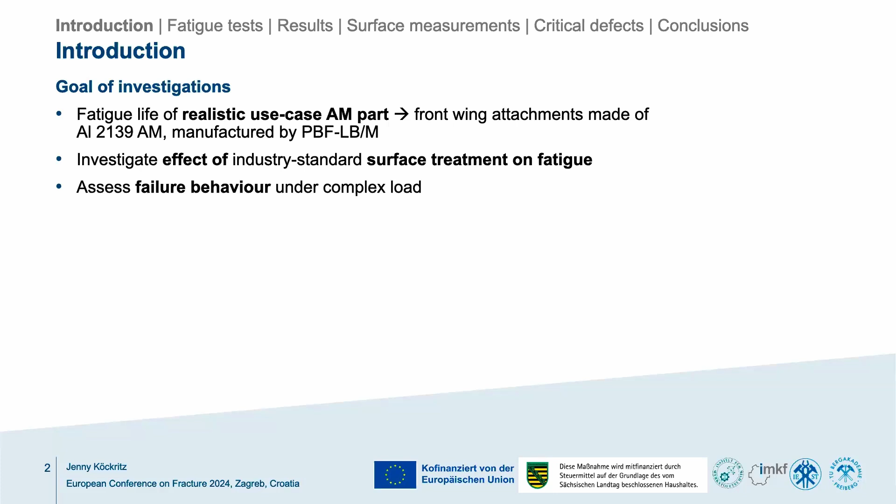We selected front wing attachments out of 2139 aluminum, produced by selective laser melting. We also wanted to investigate the effect of an industry standard surface treatment which you can find at producers, and also assess the failure behavior under a complex load in this use case part.

The use case we selected are these front wing attachments for a race car, highlighted in red in the picture. They have a multitude of requirements. For example, they have to be very lightweight and still carry the load of the whole front wing together with all the loads applied there. The loads involve aerodynamical loads, but also impact loads and quasi-static loads. In addition, they have to show very good aerodynamic behavior because they have to guide the airflow downstream to the rest of the race car.

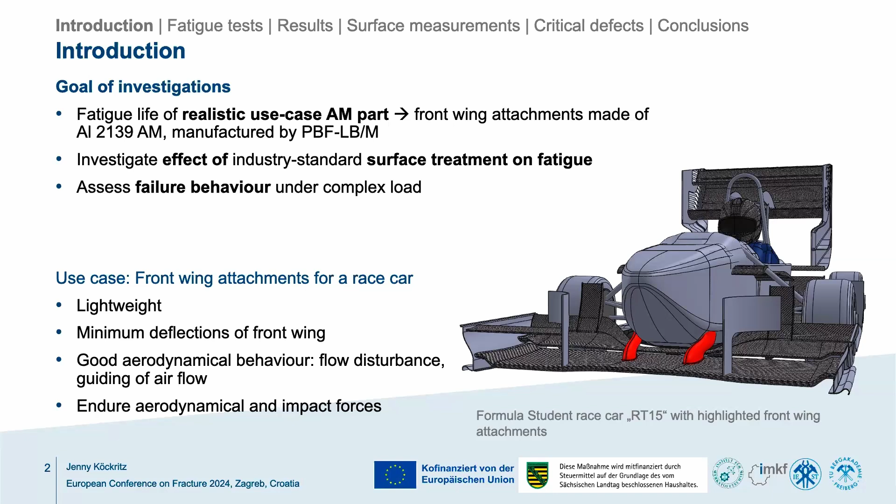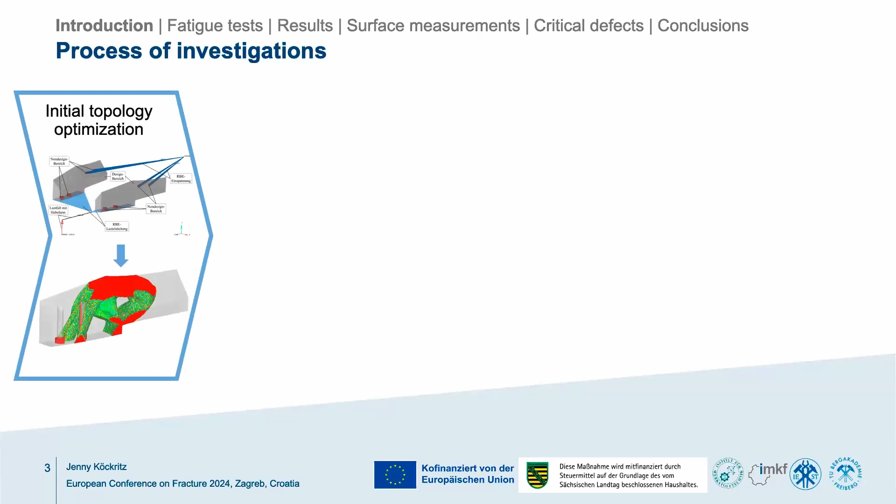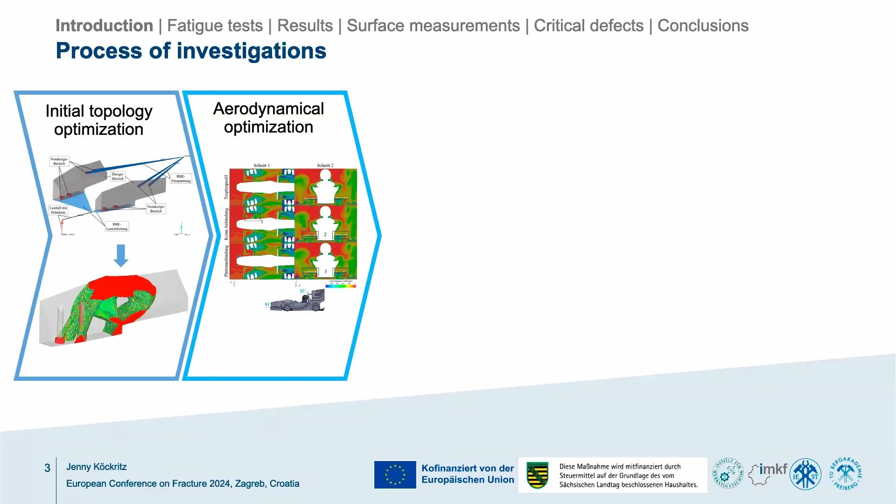I'm going to dive very shortly into the design process because this is supposed to be realistic. First, we did an initial topology optimization of the design space. Based on that, we did an aerodynamical optimization of the outer shape of these parts. We used this outer shape as a starting point for the topology optimization of the inner structure. The result were thin-walled hollow pieces, which have varying wall thicknesses and some inner structures for stiffness.

We performed fatigue tests on these parts in two surface conditions, and we also did roughness evaluations and fractography after damage.

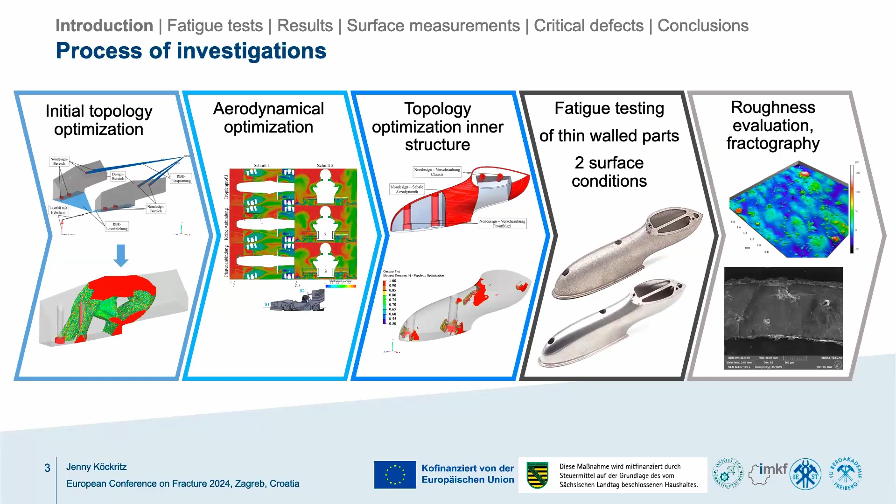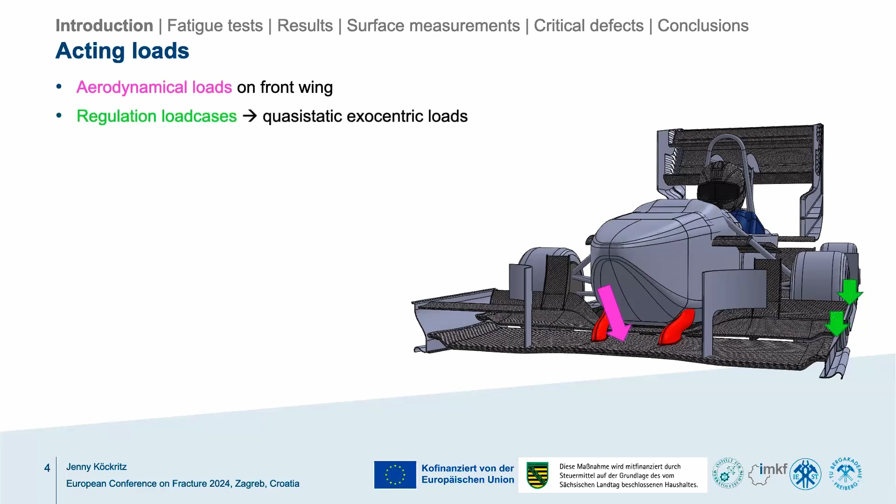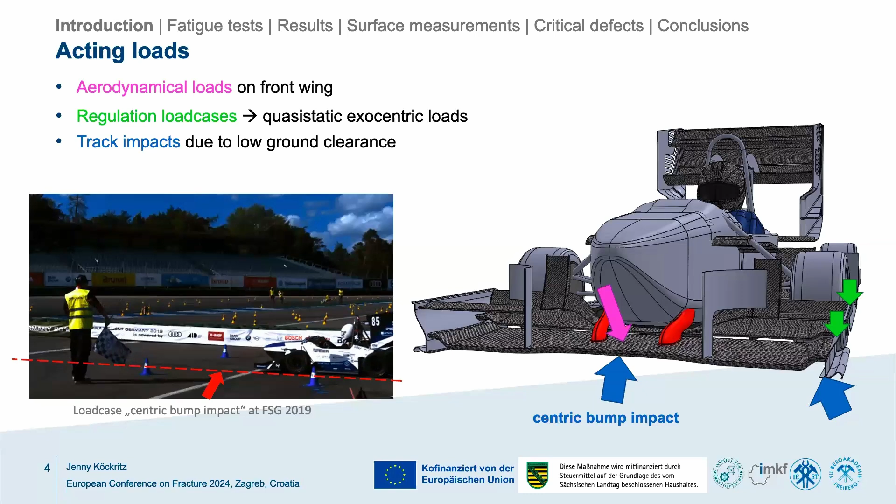To perform the fatigue experiments, the attachments shown earlier were scaled at a factor of 1 to 3 to allow for more parts to be manufactured. We tested 18 specimens in 2 surface conditions. Both types of parts underwent a T4 heat treatment before surface treatment, or no surface treatment, as is usual for this aluminum alloy. We tested as-built specimens, so only support structures removed and nothing else done, and trowalised specimens, which some of you might know more under the term vibratory cut. Both of these are shown in the lower pictures here.

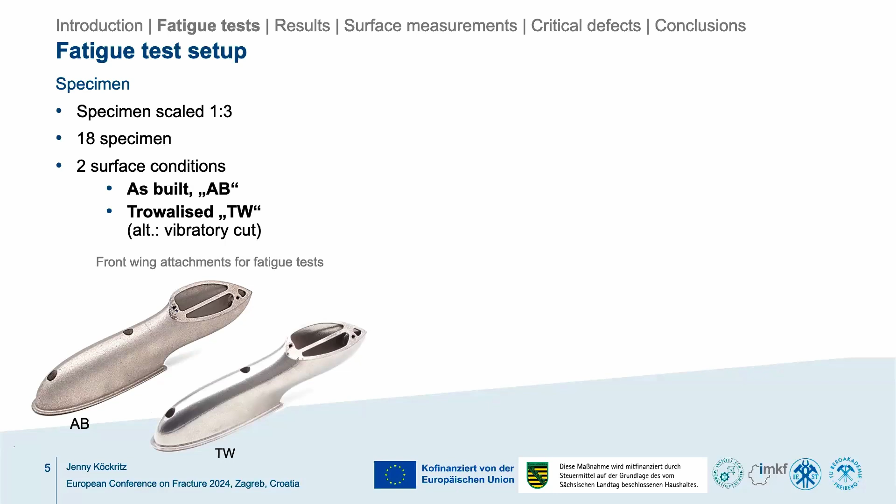The fatigue tests were performed in a test rig with force applied at an angle and an offset. The result is a multi-axial load case, and the highest tension stresses under a stress ratio of R0 can be seen here in the lower part of these front wing attachments.

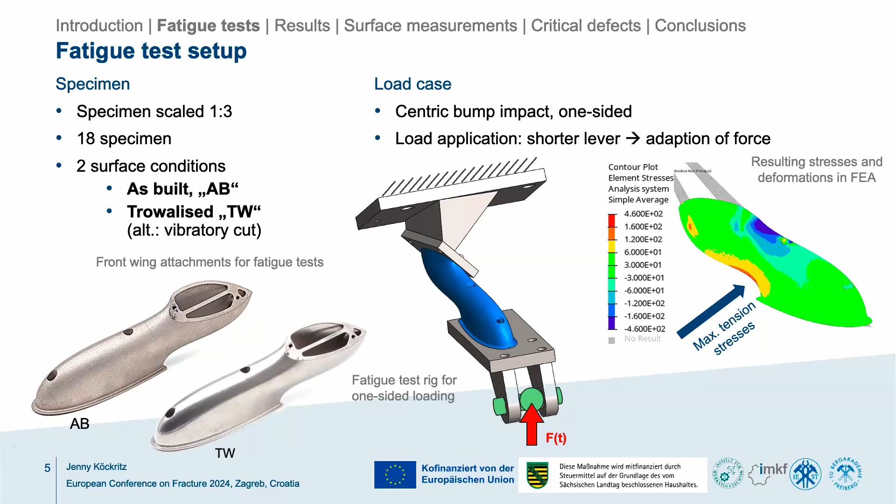So based on our knowledge, we would all assume, hey, we have these polished parts, they look quite good in the picture, they will show a better fatigue life. However, our experiments showed that this didn't happen. In this diagram, you see in blue the as-built specimen and in orange the trowalised specimen, and there is no significant difference between the two. We might observe a little bit less scatter in the as-built specimen, which is also not very intuitive, and maybe a bit more inclination in the trowalised ones, but this is not a huge difference.

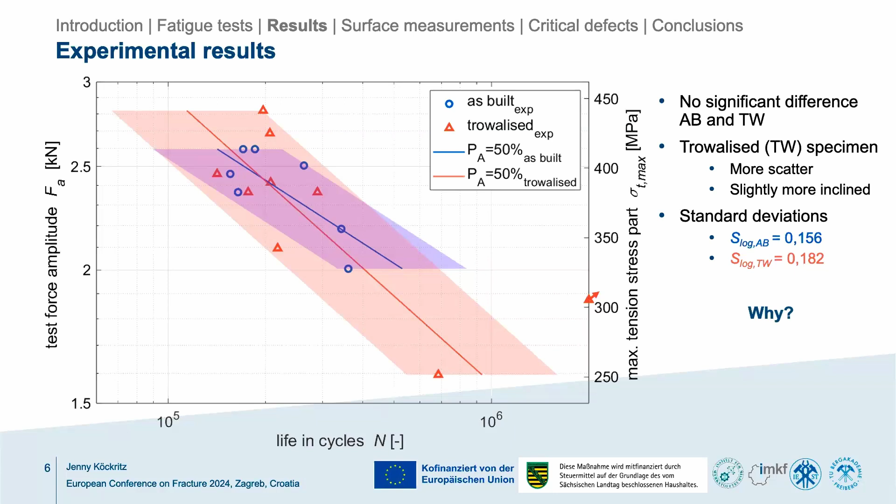So the question is why? First we're going to look at the surface measurements that we conducted. The surface measurements were done in the area of highest stress at the lower edge with a confocal microscope, and the results are displayed in this diagram.

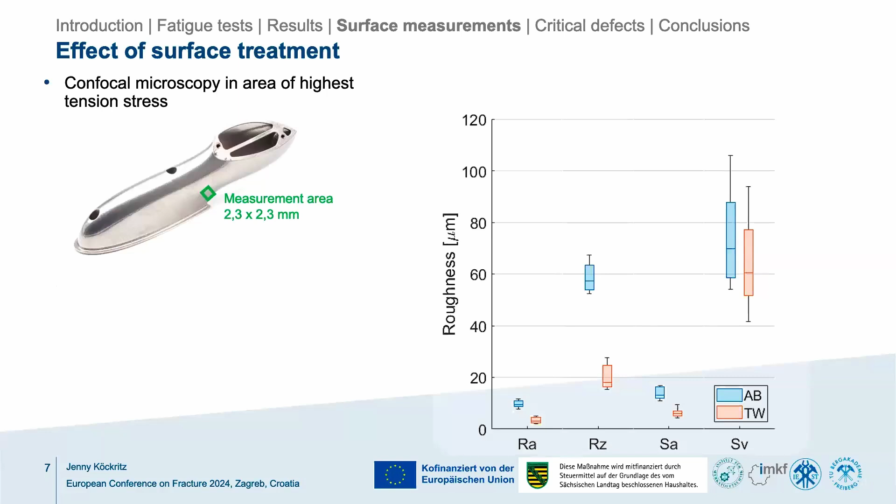Surface measurements were done for all specimens. The first thing we can see on the left side here is that the line roughness values of RA and RZ did actually show an improvement with trowalising, so we reduced RA and RZ. However, if we look at the values of the deepest valleys in the measurement area, we see a big scatter and not a huge difference between the two.

If we look at the topography of the as-built specimen, we see kind of a bumpy surface with some baked-on particles, some valleys, some peaks. And if we look at the topography of the trowalised ones, we see that the surface treatment was actually able to take off all the peaks, but wasn't able to reduce the valleys at all, which are the detrimental effect for fatigue in the end.

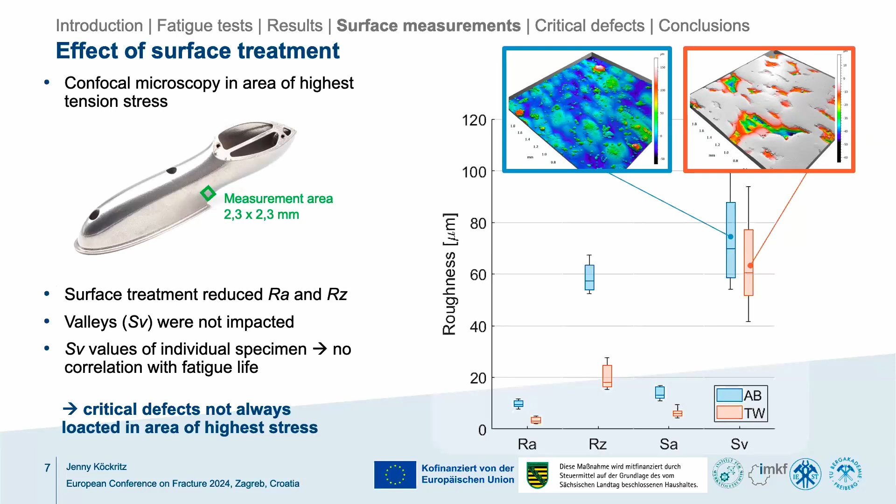So SV values were not impacted. And if we compare the SV values of the individual specimen with their fatigue life, we cannot observe any kind of effect which we should see. The reason for that is that the critical defects are not always located in the area of high stress in these parts.

So let's have a look at these critical defects. At almost all of the specimen, we could observe crack initiation at a huge printing error defect, here in one of the as-built specimen and here in one of the trowalised specimens. The defect depth was between 50 microns and 800 microns, and we have a thin-walled hollow piece, so this is a significant part of the wall thickness.

If we look at the geometry of these defects, we see that we have huge undercuts, sharp notches, and maybe a few residual particles. We can observe crack initiation at several points at these defects.

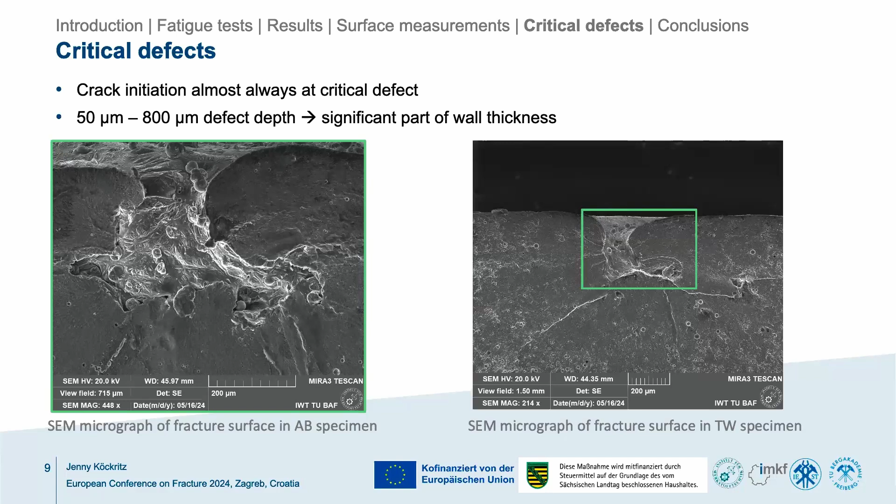We also did some EDX measurements of these defects, and we can observe huge oxygen concentration in these. So they very likely originate from the printing, because this specific alloy, the 2139 alloy, needs very high energy densities for printing. At the same time, we have a very thin-walled piece that doesn't have a lot of support structures, so heat isn't dissipated very well. In combination of the alloy with the geometry, that means we have a higher chance of printing errors to occur here.

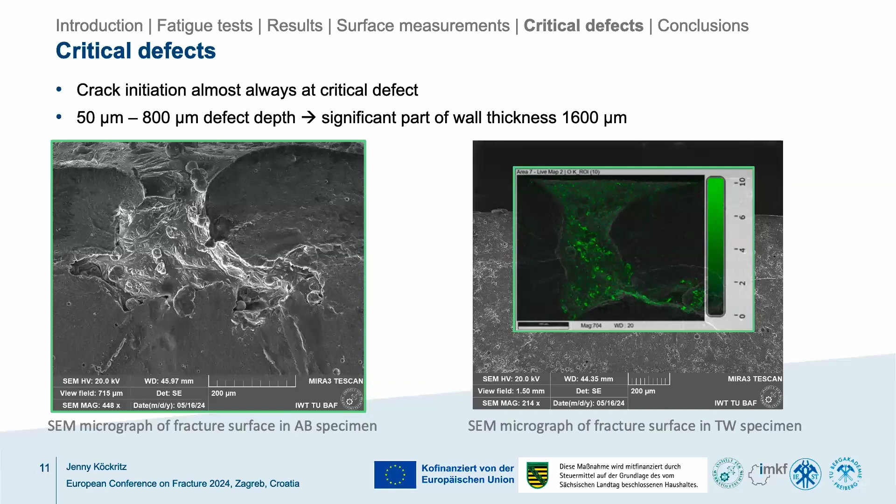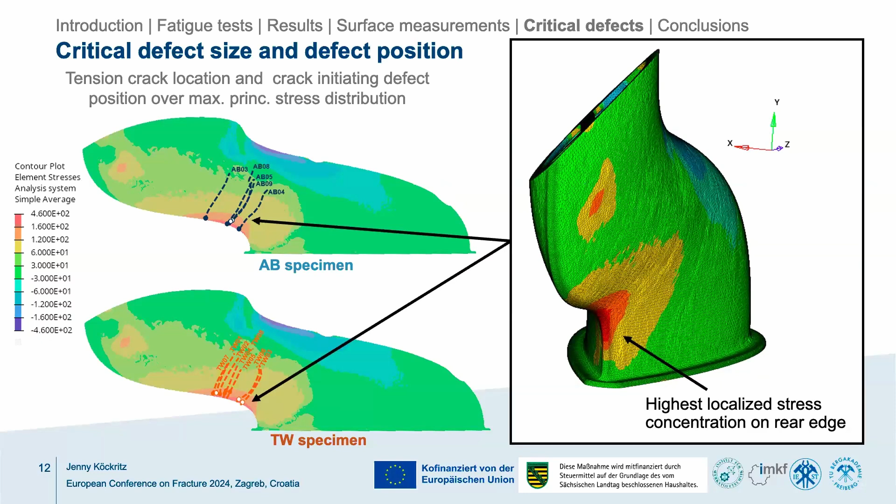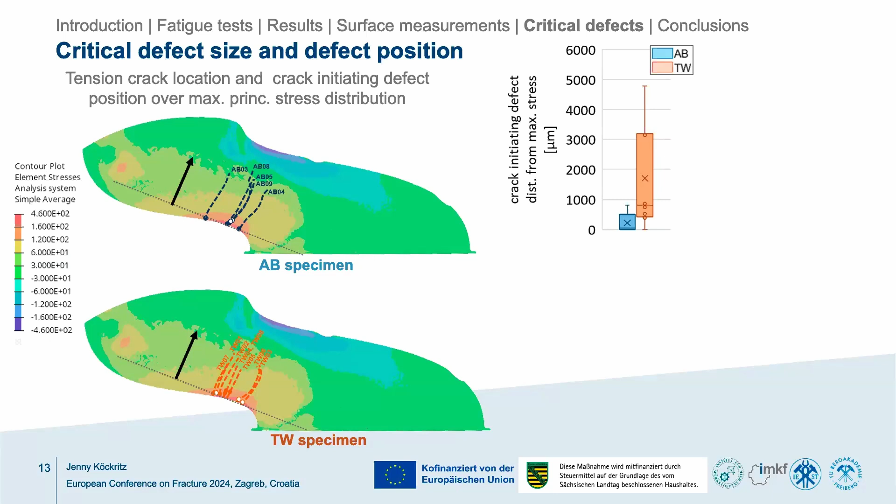If we look at the distance of these crack initiating defects from the rear edge, highlighted by the little black arrow, we can see that in the as-built specimen, the crack initiating defects were much closer to the actual stress concentration, while in the trowalized ones, the defects were further away. If they're further away, lower acting stress should have a longer life.

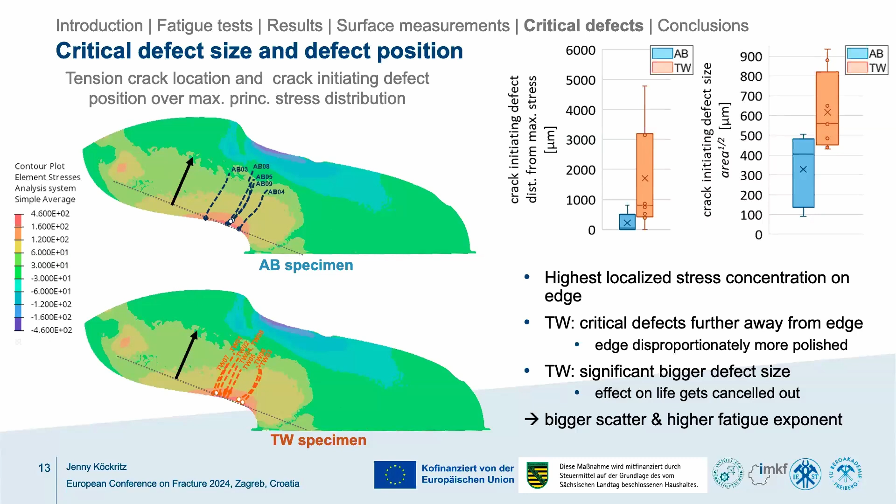However, if we look at the defect size, the defects which led to damage in the trowalized specimen were also a lot bigger. So in combination, we have defects which are further away but have a higher size, and so the effect on fatigue life kind of gets cancelled out. This explains, however, the bigger scatter for the trowalized specimen, as well as the slightly more inclined SN curve for the trowalized specimen.

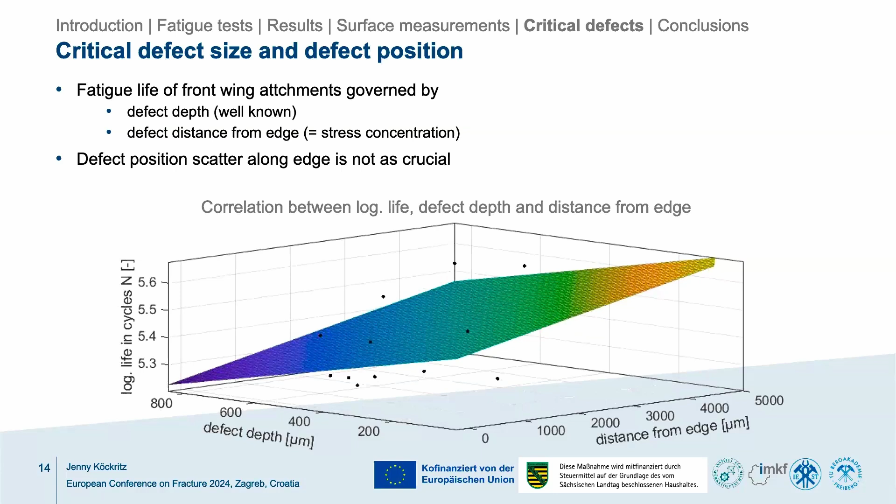We can kind of correlate for this specific use case that the fatigue life of the individual specimen is mostly dependent on the defect depth, which is not very surprising, and the defect location in terms of distance from the edge. The scatter along the edge didn't play such a big role for this use case. However, the correlation is not very good. I know that, but still, this is the one that shows the best correlation here.

In conclusion, we could see that in our use case, the surface treatment didn't show any effect on the fatigue life. The reason for that was that the surface treatment that was selected, this industry standard surface treatment, wasn't able to remove all the deep crevices, where the fatigue cracks initiated. The fatigue life correlated best with defect depth and defect position.

And I have to add, even though I showed all these huge defects, that the parts that we produced and tested performed much better than the material values of fatigue tests that were done with this alloy by the producer who provided us with these parts. So still the parts outperformed the expectations that we had.

We did observe some use case specific failure behavior. Due to the thin walled hollow structure, we didn't need a lot of support, which is actually pretty good if you look at additive manufacturing. However, this also meant that we didn't have good heat dissipation here, and printing errors were more likely.

Also, this 2139 alloy is very brittle. So we could observe sudden crack growth, and also sharp defects might be more critical, even if they're small.

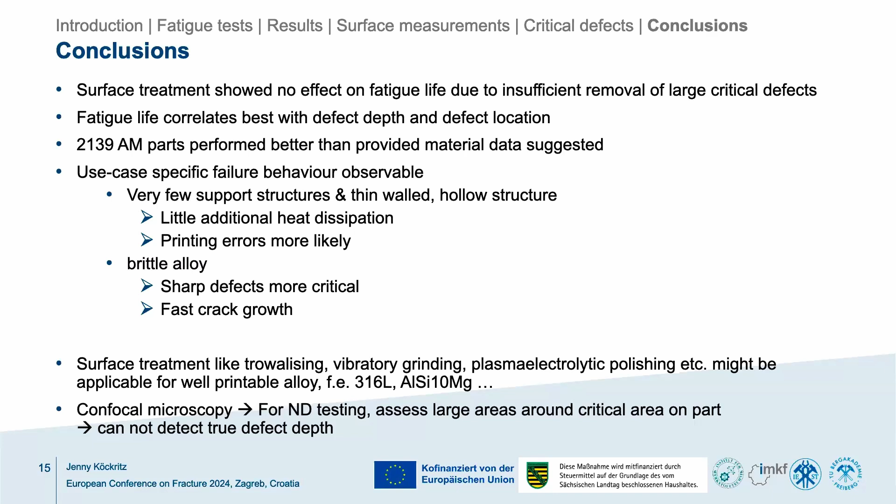And if you are going to perform confocal microscopy to assess the surface quality of your part, do measure huge areas around your actual stress concentration to be sure to cover all possible defects, which can lead to fatigue failure. With this, I want to conclude my presentation, and I'm looking forward to your comments and questions.